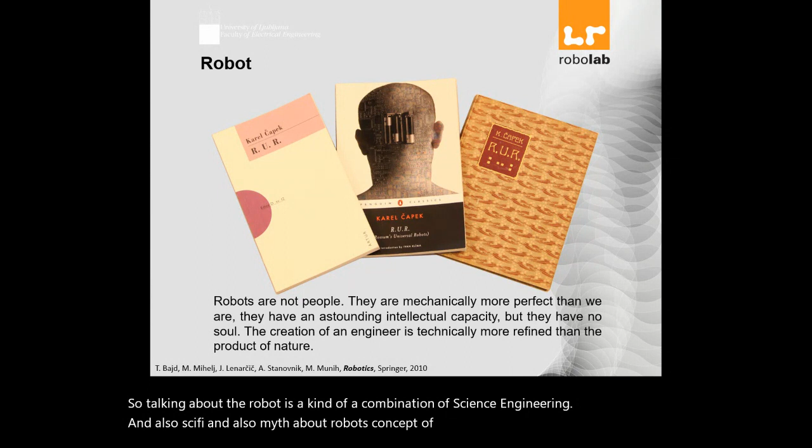Talking about robot is a kind of combination of science, engineering, and also sci-fi, and also myth about robots. Concept of robot is kind of related to creation, because when we talk about robot, the first thing that pops in mind, specifically for people who are not industrial or technical people, they think about humanoid robots which look like human, behave like human, they have behavior similar to what we do.

I don't know if you know an author, Isaac Asimov. Have you heard of him? Well, long back, teenage stories.

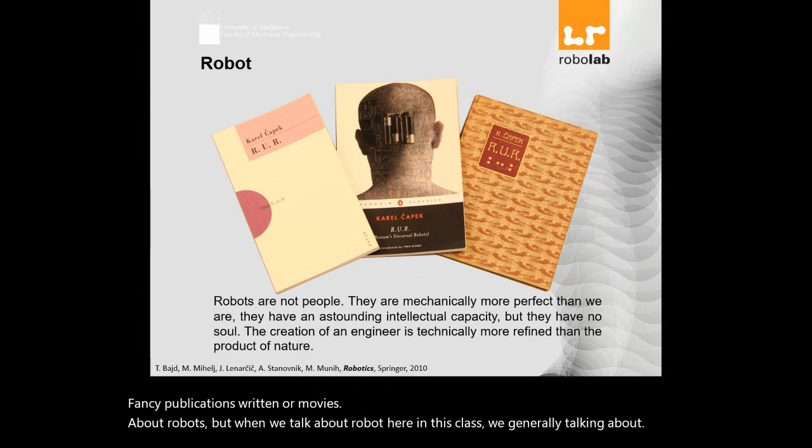Basic rules of robots, and you have seen these in movies and different fancy publications, written or movies about robots. But when we talk about robots here in this class, we're generally talking about actually mechanical creatures which can make moves. So the concept of creating a machine that can operate autonomously dates back to classical times.

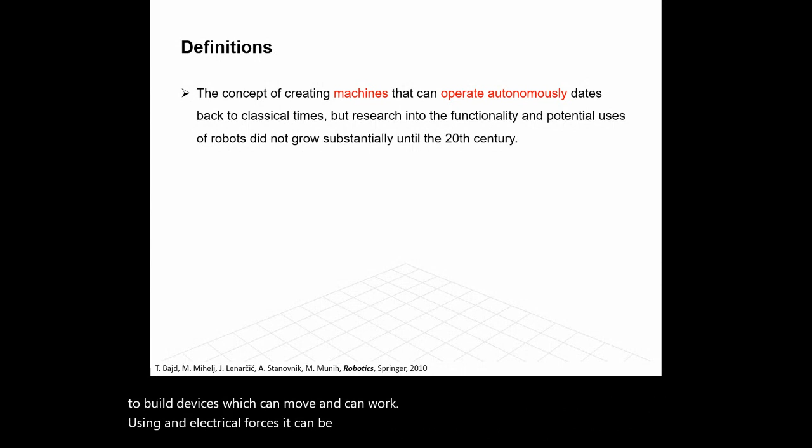But research into the functionality and potential uses of robots did not grow substantially until the 20th century. Actually, when our engineering became mature enough to build devices which can move and can work using mechanical or electrical forces, it can be controlled as well. So control is a key turning point in designing robots.

Throughout history, it has been frequently assumed by various scholars, inventors, engineers and technicians, that robots will one day be able to mimic human behavior and manage tasks in human-like fashion.

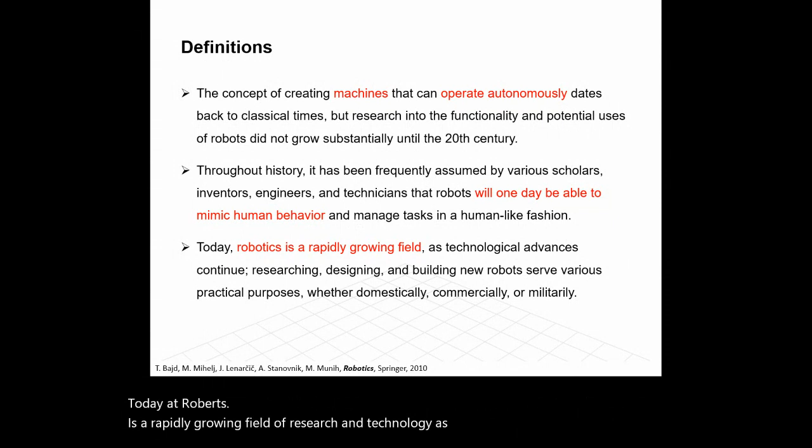Today, robotics is a rapidly growing field of research and technology. As the technological advances continue, researching, designing, and building new robots serve various practical purposes, whether domestically, commercially or military. You see robots all over the place now.

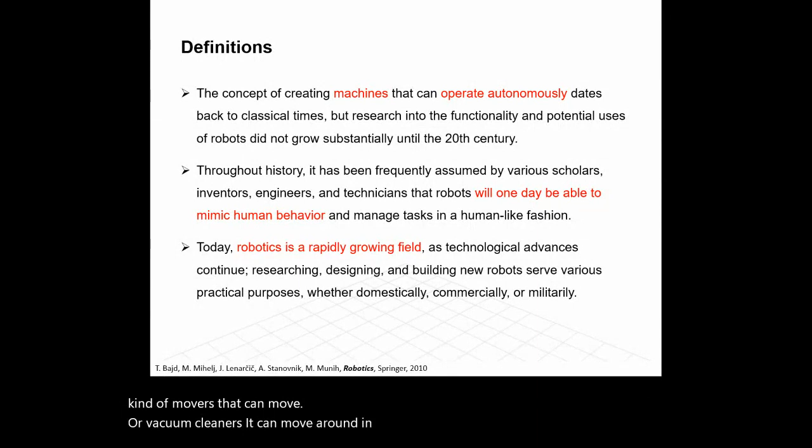It's not just industry. You see robots even at home. You have these kind of mowers that can move, or vacuum cleaners that can move around in the house and do basic things. There are concepts of robots.

Even we can add to this definition. We have also some software robots. The concept of autonomous operation has moved to software as well. You have bots on the internet. They continuously work, collect information, send messages, monitor those things automatically.

The difference between the robotics we're talking about and those kind of bots is all robots have a physical or mechanical implementation. They have a physical or mechanical structure.

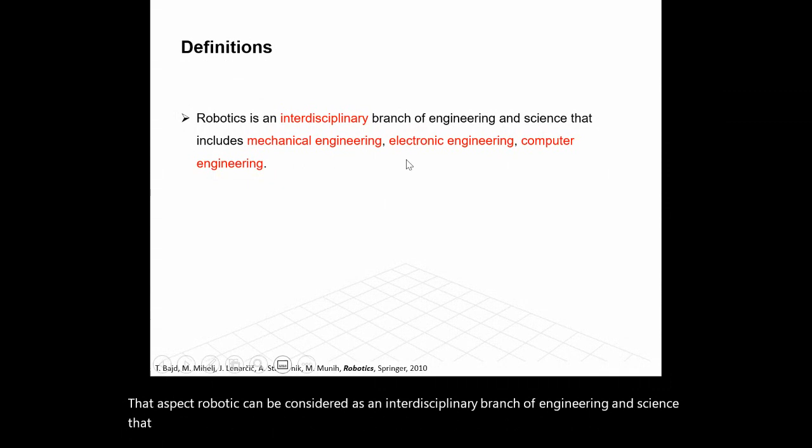So in that aspect, robotics can be considered as an interdisciplinary branch of engineering and science, that includes mechanical, electronic, computer engineering with different shares, depending on what kind of robot you have. The mechanical part might be a bigger part, or computer and electronic part in other kind of applications can be the more important part of the robot.

The field overlaps with electronics, computer science, artificial intelligence, mechatronics, nanotechnology, and even bioengineering.

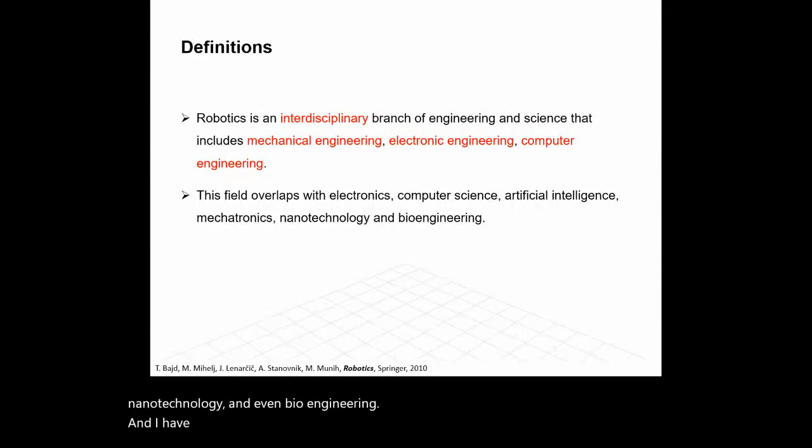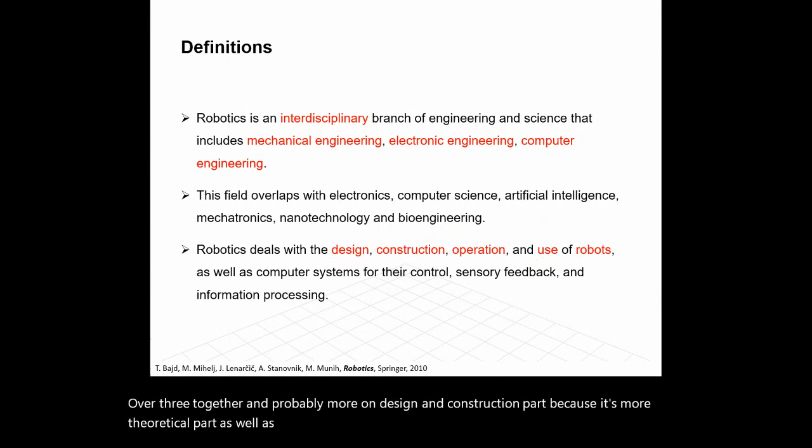Robotics deals with design, construction, operation, and use of the robot. So I would say probably it goes backwards. Using a robot, a larger number of people know how to use robots, and the operation actually. But the construction is higher level of information, and design is higher level of information as well. We try to move over all three together, probably more on design and construction part because it's more theoretical, as well as computer system and control, sensory feedback, and information processing.

From my perspective, robots are very similar to computers. In computers, you can program, you can interface with the computer. Your computer can interface with other computers, with the environment. You might program something which works properly, you might write a program which fails, you might write a program which works generally but sometimes fails. Exactly the same thing with robots.

The big difference is in robots, you have physical movement. That's a big, big difference. So what I'm doing in a computer might not make any sense in the physical world. I ask my computer to do something, and it just runs the program and it doesn't work, or it works. But in a robot, you write a program, and this program must be compatible with what you physically have as a robot, what you physically have as your environment and workspace.

So it's similar, but more restricted. And I think it can be more difficult because you have to have knowledge of what you have in your robot environment and the capabilities of your robot. There are similarities, but also big, big differences.

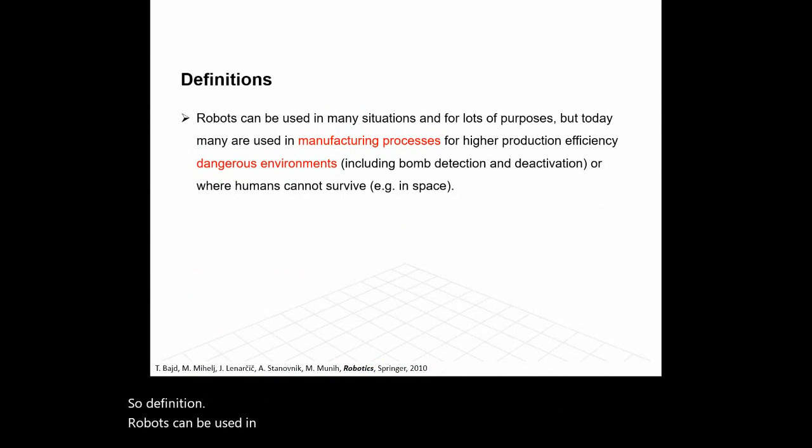Robots can be used in many situations for lots of purposes, but today mostly we are talking about manufacturing robots, which are used in manufacturing processes for production rate, for more efficiency, and for jobs which are dangerous or even impossible for humans to do, for environments which are toxic or very difficult or hard for human workers to go and work.

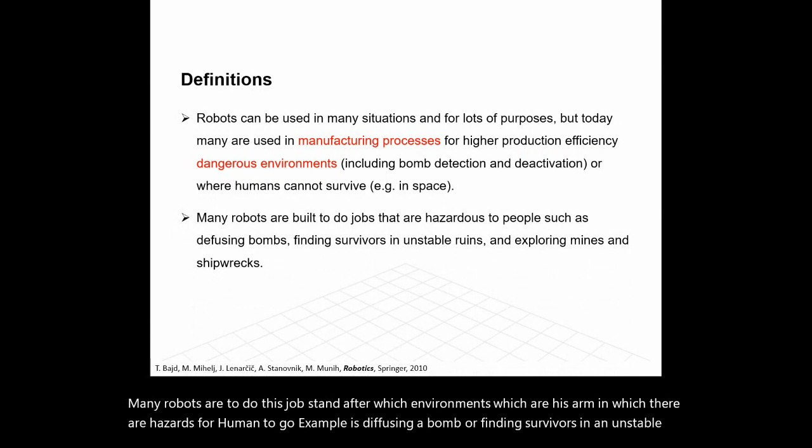Many robots are built to do these jobs in environments which are hazardous for humans to go. Examples are defusing a bomb, finding survivors in an unstable collapsed building or structure, and exploring areas humans can never go.

Robots have been sent to Mars before even humans can go, right? So if you want to give the credit, you have to give the credit to robots. Actually, robots have been working, and robots are already there before a human being can think of moving to Mars.

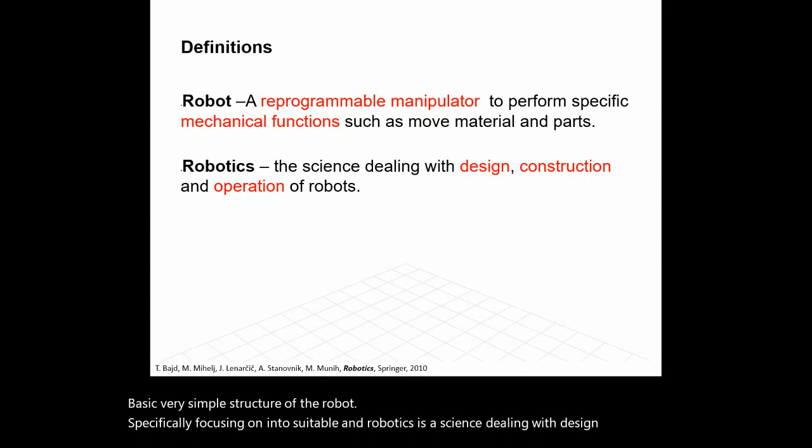By definition, a robot is a reprogrammable manipulator to perform specific mechanical functions such as move material and parts. This is a very basic, simple structure of the robot, specifically focusing on industrial robotics. Robotics is a science dealing with design, construction, and operation of robots. So we are talking about design, construction, and operations mostly in this class. Okay, any question?

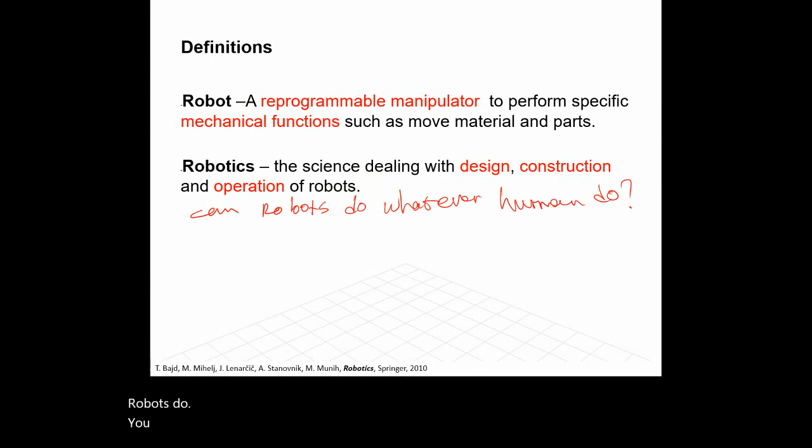What do you think about robots? So, what do you think? Can robots one day do whatever humans can do? In the future, can robots do whatever humans do?

What do you think, you say yes? Everything? Do you mean mechanically or mentally? I think it's limited by the human setting it up.

Okay, so for instance, you think it's possible for a robot to do figure ice dancing, for instance? Oh, that will be a tough call, right? Or doing gymnastics, think about the mechanical aspect of it.

Oh, I have to see the messages. I can't see them, sorry.

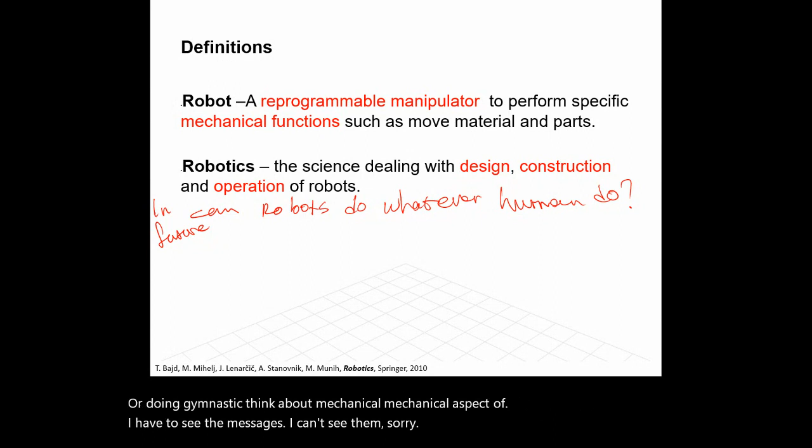If I want to talk about what these robots can do, you can divide it into two parts. One is intellectual, the other one is mechanical.

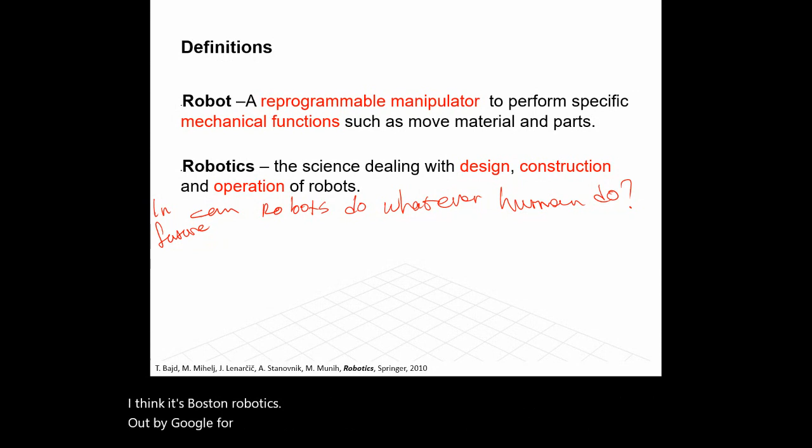Human body mechanics and movement looks simple. The human body looks very vulnerable, with all those limitations we have. But believe it or not, the mechanics and the way our body works is very, very difficult to repeat by mechanical devices. I don't know if you follow this company called Boston Dynamics, owned by Google for a while. Google sold it to a Japanese investment company called SoftBank. They are doing really good things, very beautiful movement, but they're still not complete.

Think about simply your hands, fingers, the accuracy you can work with, the movement and everything you have in our body. Do you know how many skeletal muscles we have? Muscles which are connected to our skeleton, by which we can make movement. Do you know how many we have?

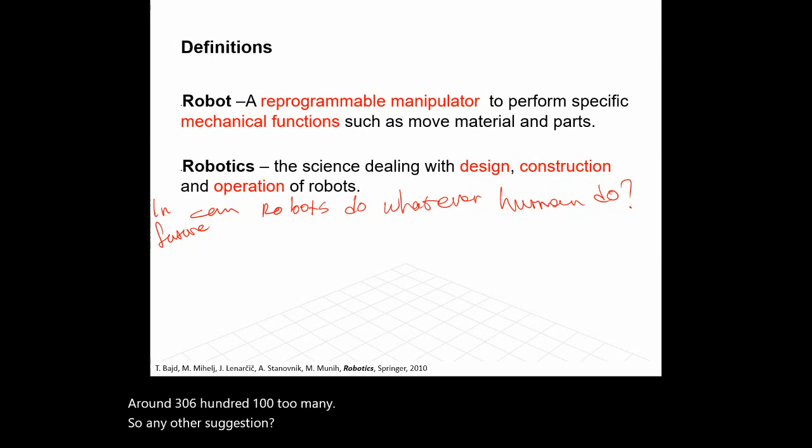I guess, isn't it close to 300? Around 300, 600? Burhan said too many. Any other suggestion? How many skeletal muscles do we have? 10,000? Oh, no, that is too much. Well, talking about muscles per joint, this is a general term, skeletal muscles which are connected to our skeleton and by which we can make movements.

Normally, it's not the case for everyone for sure, but on average we have 300 muscles each side, moving skeletal muscles, which makes 600. 600 muscles means 600 actuators, actually. Now think about a robot with 600 actuators. Well, people who are working with robots, how many actuators do we normally have in a robot, in an articulated robot?

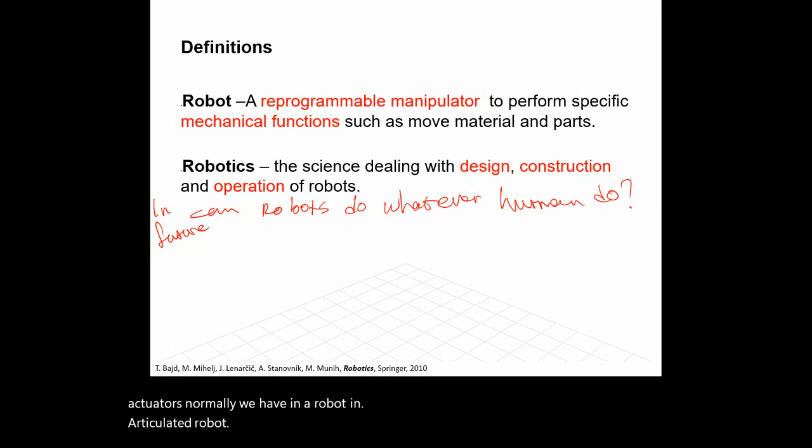Not number of freedom, how many actuators? For each movement we need an actuator, so it's around 6, 7, 10. Maximum, if you want to make it very complicated, it doesn't reach 20 for sure. So you have a robot with 6, 7, 10 actuators you can control, and you want to compete with a human with 600 actuators. It's not an easy task. I'm not saying it's impossible, but to reach that level we have a long way to go.

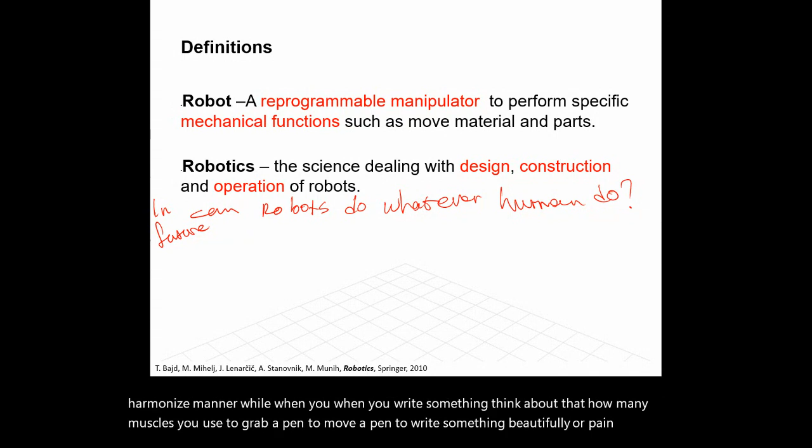We have to find out how to control all these in a harmonized manner. When you write something, think about how many muscles you use to grab a pen, to move it, to write something beautifully or do painting, or do other things at the same time. It's not easy, but hopefully in the future we will have robots that physically move like a human. That's why I'm not worried about our jobs. Robots cannot take our place in the close future, and hopefully never can they steal our jobs.

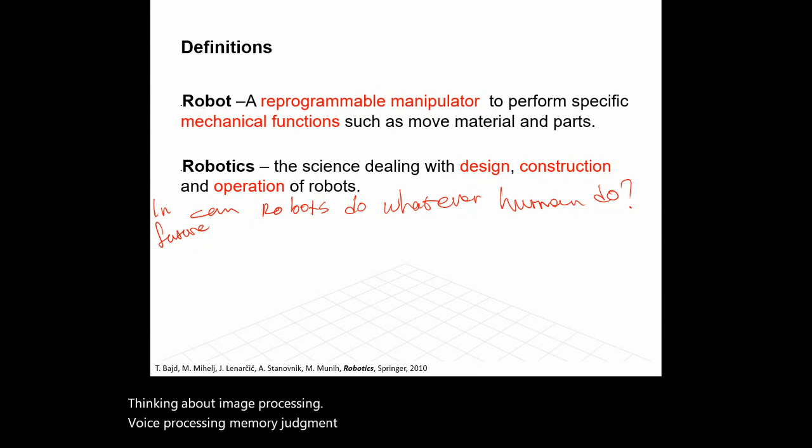Intellectually as well, we have a long way to go. Thinking about image processing, voice processing, memory, judgment, decisions, calculations, and computing - computers and robots are far, far from us. At least I don't think there is a threat in my lifetime from computers or robots.

Any question or any other thoughts you want to share? Okay, so no one worries about robots.

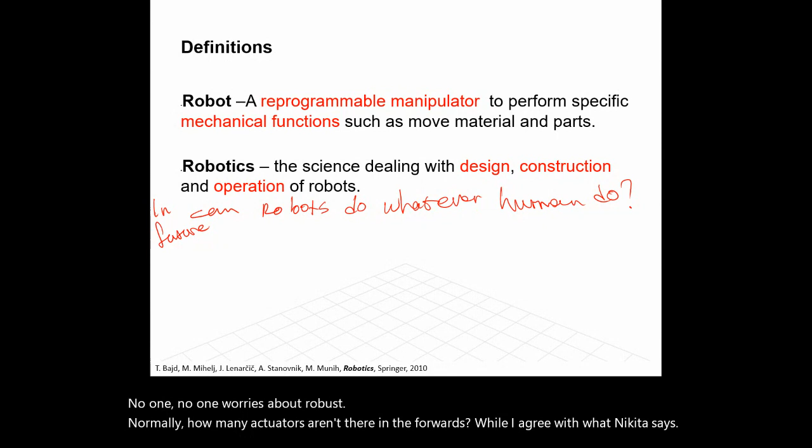Normally, how many actuators are there in a robot? Well, I agree with what Nikita says. In many robots, we have 6 degrees of freedom in articulated robots. 6 degrees of freedom means that normally at each joint you should have an actuator. So it should be around 6, not less than 6 definitely. It's normally 6 or more, but not too many. You can say for each joint I have 2, or I have more, but it will be between 6 and 10, I think - shouldn't go higher. That's the best of my knowledge. I don't know if anyone else can say.

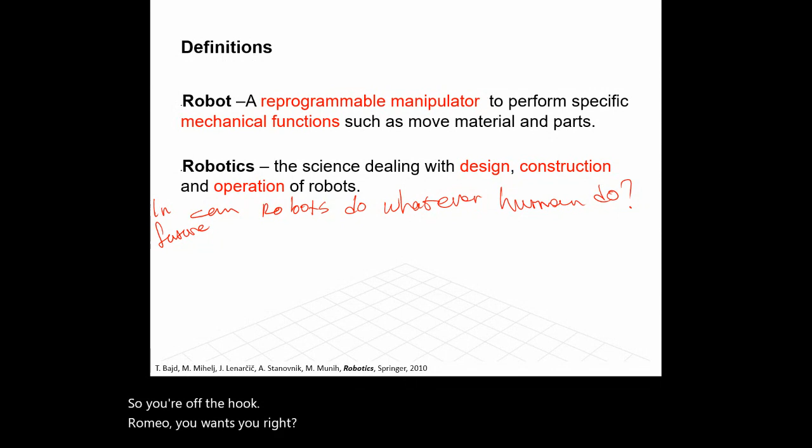Let me check who else said they've been working with robots - I know Gino and Mike. Jordan, Lou, are you working with robots? No, okay, so you're off the hook. Romeo, it was you, right? Yes. Okay, you answered the question - how many actuators we normally have? Yeah, 6 plus some actuators for grippers. Jordan, yes, that's right. So it's 6 plus, okay?

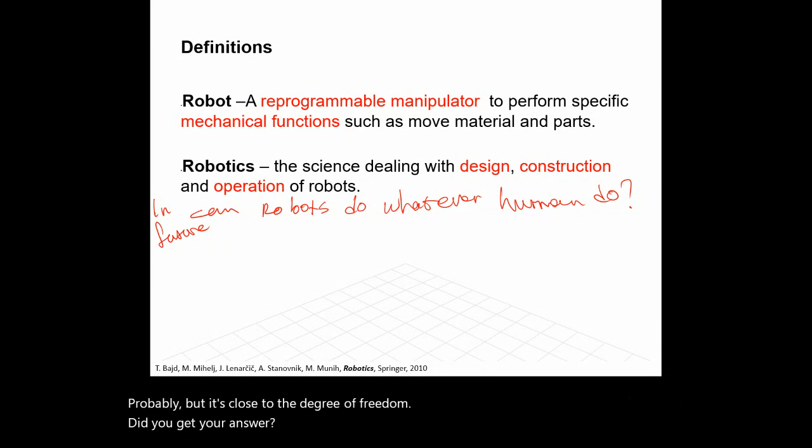If you have n number of degrees of freedom, your actuators should be n plus - a few more actuators, probably auxiliary actuators like for a gripper, or for some you might have more than one motor, or a combination of these. But it's close to the degree of freedom. Did you get your answer, Nasir? Okay good, thank you. Let's get back.

All right, so classification of robots - this is a general classification. I like it because it doesn't limit us to just one specific type of robot. It's divided into 4 categories of robots.

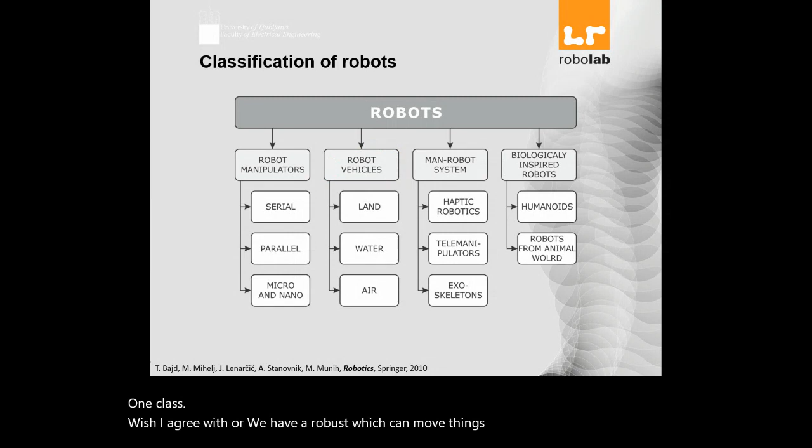Robot manipulators, one class. Vehicles, which I agree with - robots which can move things and are used for transportation. Man-robot systems, robots with interface interaction, direct interaction with humans. And biologically inspired robots - robots which are inspired from biology.

So manipulators can be divided into subclasses. A simple division - not the best, but very general and simple - are serial robots, parallel robots, and micro and nano robots. These are more advanced technology kinds of robots.

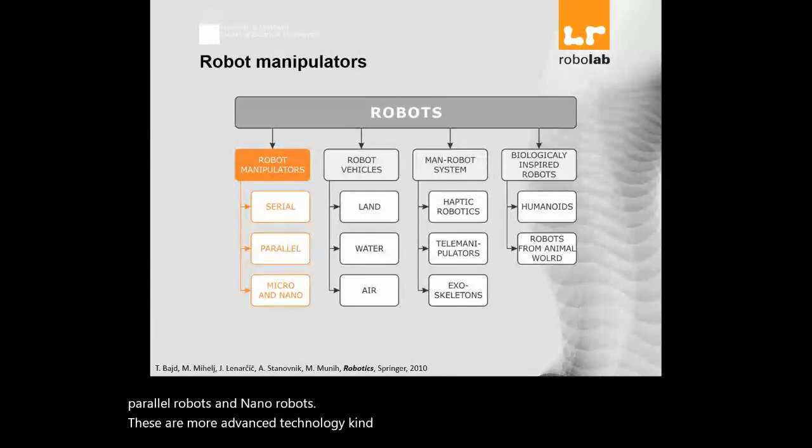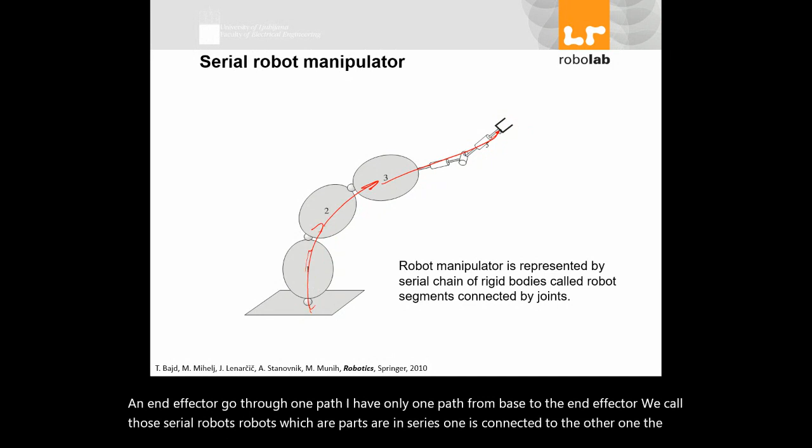In the schematic, you see the end effector here, and this is the base. The connection between base and end effector goes through one path - only one path from base to the end effector. We call those serial robots - robots whose parts are in series, one connected to the other, to the other, and to the end effector. We call these serial robots.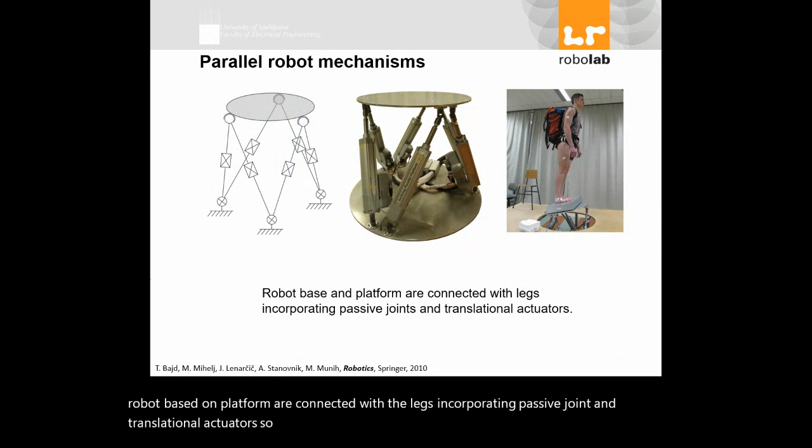So here you see on the right hand side, where is the robot in this figure? Underneath, can you see the robot? Yes, exactly, the platform under the feet here.

This is the robot, okay? Not the human, no robot. Robot is here, down here. So in this, this is a robot connected from, this is bottom up.

We also have robots in industry like this. What you see here, this is another robot connected, so it's connected to the roof and mostly used for pickup applications. Let me show you one example. They do have example of this type of robots.

No, not here. But you can search for robots. I don't know, can I share with you here? Let me see if I can do it.

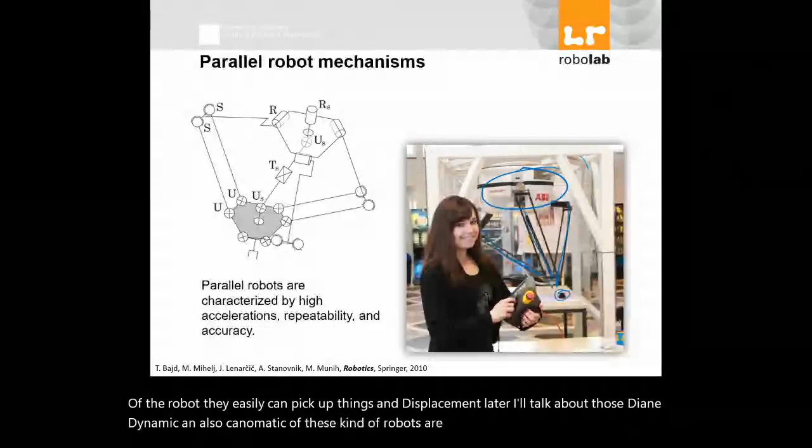Later, I'll talk about the dynamic and kinematic of these kind of robots, which are slightly different from serial robots. Basically, with parallel robots, you are reducing your freedom because there are more bonds connecting the end of the robot to the base. So generally it's more limited in terms of kinematics, but they're mostly considered to be faster, more accurate, and very popular in pick and place robots.

So you have a production line, and these type of robots are connected to the roof, and they just pick things and place them well in a position. It can be a box, or it can be in manufacturing on a conveyor. Okay, a parallel robot.

Have you ever seen any parallel robot in your work, guys who are working with robots? No. Yes, I have one in my lab. We use one for putting apples in trays. Oh, all right, okay. So let me see, I don't know.

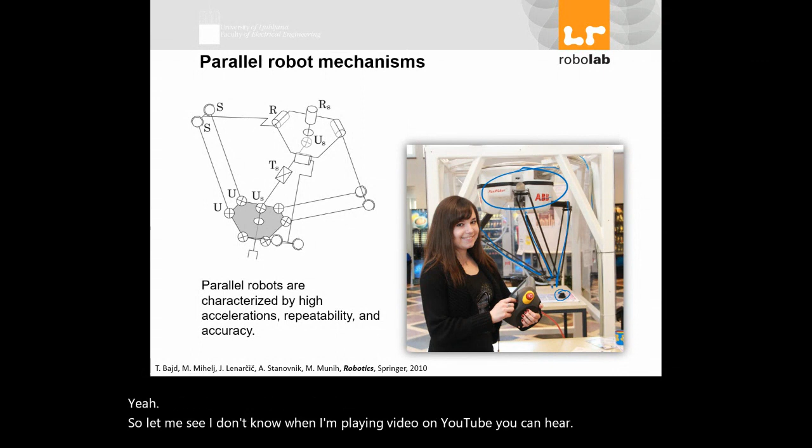So this is a parallel robot. It can work in even millimeter scale.

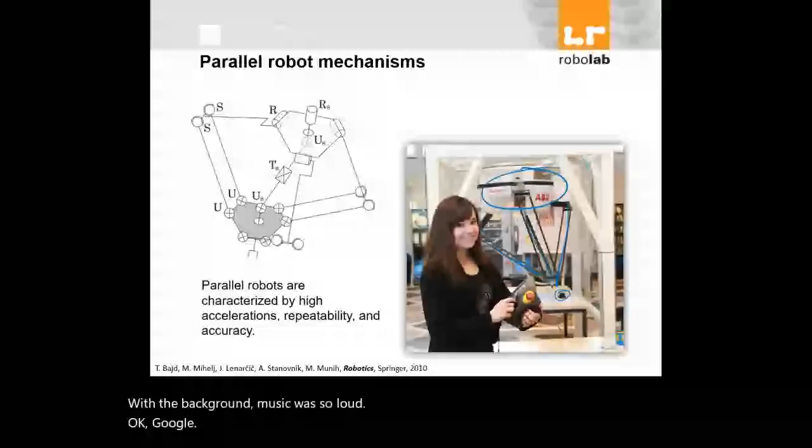Okay, going back to our presentation. So these are called parallel robot. Later, in terms of kinematics and comparing this robot with serial robot, I'll have a brief discussion about parallel robots, and there are benefits and downsides of parallel robots, and those will be discussed.

Do you know any issue with this parallel robot, Jordan? Have you ever seen that problem, or people who are working with it?

Do you know what's wrong or what can be wrong with these robots, parallel robots? Or with the particular robot in this picture? Generally speaking, there are some issues with this robot which might happen, not in every robot. We always have issues with that robot because it can bind up on itself pretty quick and you have to open up the top and readjust the linkages. And with these robots, the problem is they have...

Not the capability, actually the vulnerability of becoming collapsed. It can be shown by calculation that with this type of robot, there is a possibility it will go to a position which locks itself, and it doesn't come out without turning off. So there is a, well, in most cases...

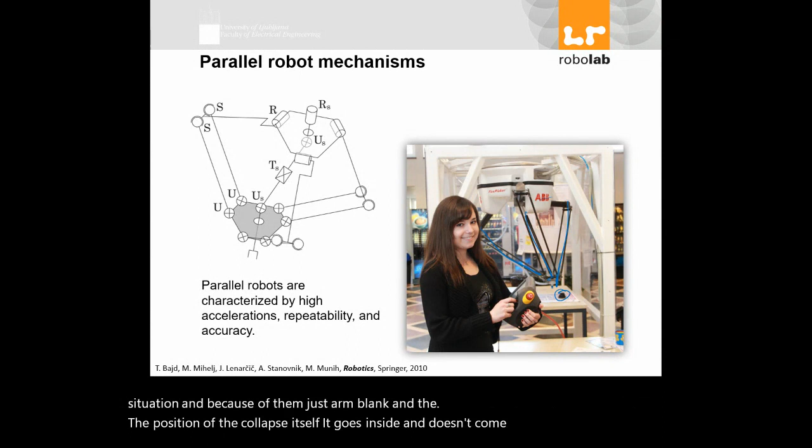Are you referring to singularity? There is a singularity, but not just singularity, here it collapses. It's a kind of singular situation - in serial robots we also have singularity, but in this one, because of the arm length and the position of the end effector, it collapses itself. It goes inside and doesn't come out, locks in that situation. You have to turn it off and open everything back up again.

In industrial robots, designers have limits and checkpoints to not let the robot get locked up like this. This ABB one, you don't see that problem. But with calculation, we show that in some cases there is a possibility this robot collapses itself and needs external help to be opened.

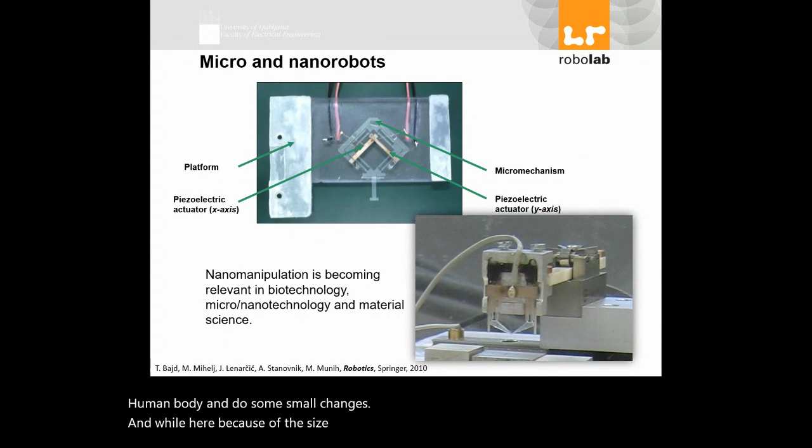Micro and nano robots, as the name implies, are very, very small kinds of robots used for operations or situations in which you normally don't send big robots, or don't have access to. These are nano manipulators enabling pushing, pulling, picking and placing, manipulation, orienting, bending and growing in a very small, micro scale environment. You've heard of applications like surgeries and biomedical applications with these types of robots - you can send them inside the human body and make small changes.

Because of the size and structure of the robot, you have a lot more limitations. You cannot use some sort of mechanical power sources. Still, mostly at research scale - in industrial level, I don't know, I haven't seen industrial kinds of this type of robot. I don't know if you've seen any nano or micro robots in practice, have you ever seen anything in class?

No? All right. Do you want to have micro nano robots inside your body? Yes? No? All right, okay. Well, I don't want to.

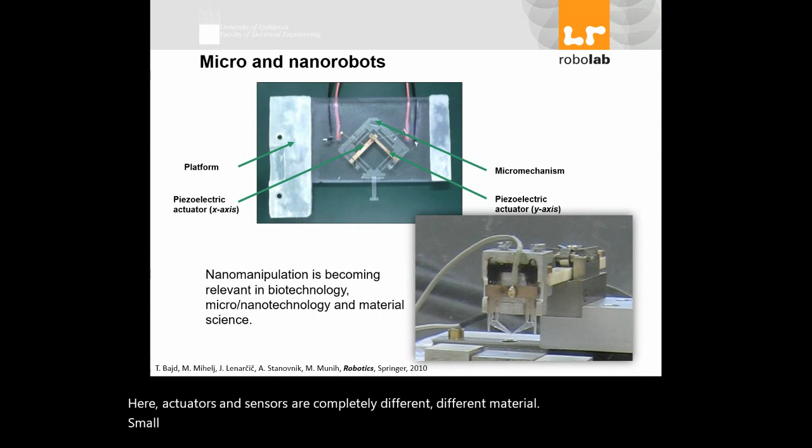Here, actuators and sensors are completely different materials. Small forces with small actuators. Sensors should be okay because they are themselves physically in micro scale sizes, but actuating is very difficult. For actuation, they're using materials - hopefully later on we'll talk about things like piezoelectric material or small electromagnetic forces inside the robot - more in research scale, not in industry.

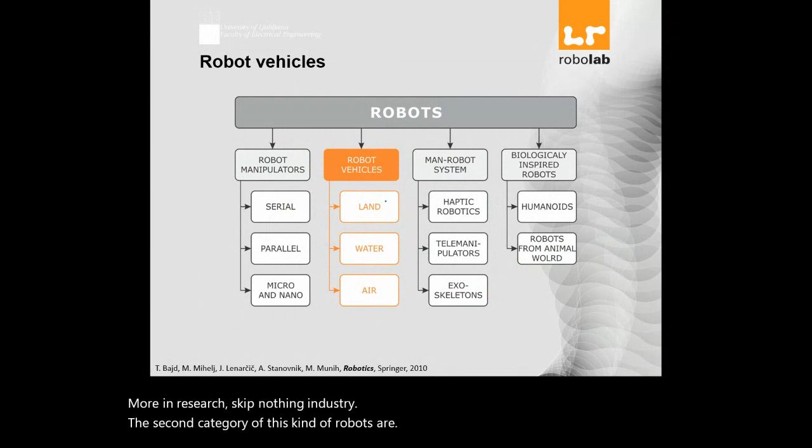The second category of these kinds of robots are transportation robots - they can be land, water, or air kinds of transportation. In these robot vehicles, we have a robot which is autonomous. It can get information from the environment - this information can be visual, or by sonar, or by LiDAR, different sensors and data input - and they have a computing part based on calculation of that information. They can find their pathway and go. Autonomous cars can be considered a kind of robot of this type.

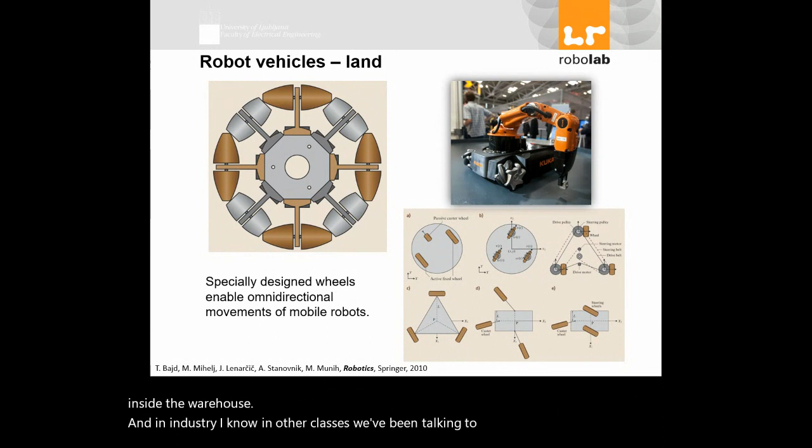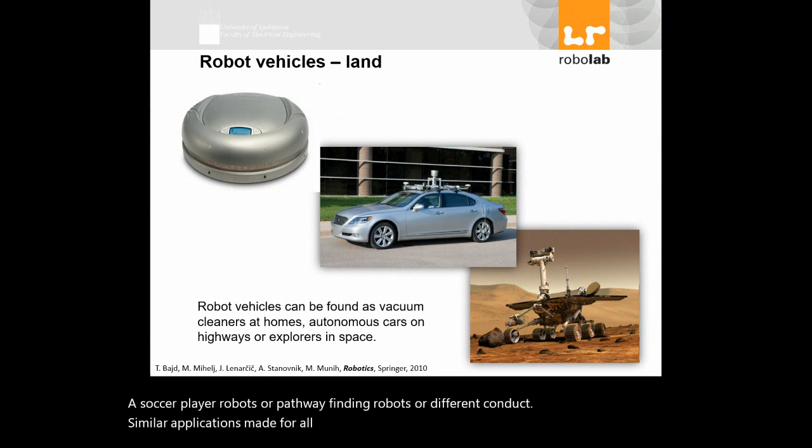On the research side, there are competitions for this type of robot, and students every year gather and build soccer player robots, pathway finder robots, or similar applications made for rescue robots as well. Other examples are autonomous cars, as I mentioned, and also robots we send to other planets. Right now the focus is on Mars, but who knows, probably other planets will be targeted as well using this type of robot in the future.

Drones or robots, they might not be completely autonomous, but they are remotely controlled. They need to have some autonomous capability as well. But they're very popular, you hear about them. They've become popular technology in military. Not just in military, they can be used in rescue, in border monitoring, in climate monitoring, in many different applications. And drones also come in small size.

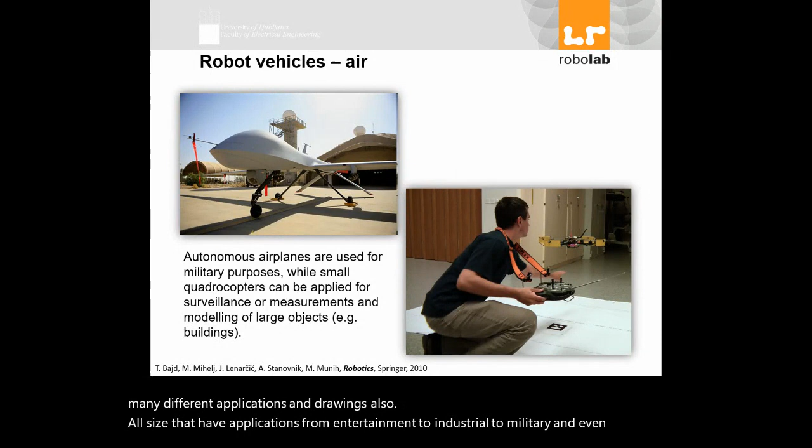They have applications from entertainment to industrial to military, and even to medical rescue applications.

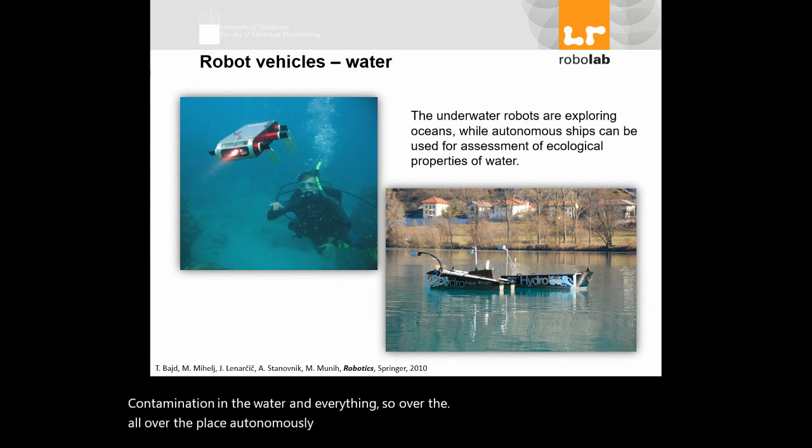So all over the place, autonomously or connected to a central control location. Any specific idea or anything you want to say about autonomous or robotic vehicles?

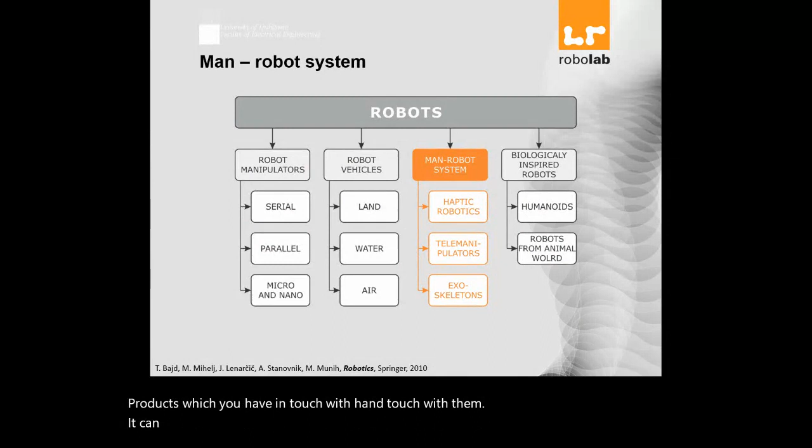The other category, based on what we have in this book, is man-robot system, where you have robots closely working with a human. It can be haptic robots, robots which you have in touch with, hand touch with them. It can be tele-manipulators, like telesurgery, teleoperation robots, and can be exoskeleton robots.

In haptic robots, the operator can sense touching objects in the virtual environment displayed on a computer screen. It's still mostly in research, because transferring sense from another environment to the human body is not an easy task. We don't have that many sensors of those types in the environment, and we also need very fine-tuned actuators to be used by the human hand or body to get the same sense from the environment into the human. But it's there.

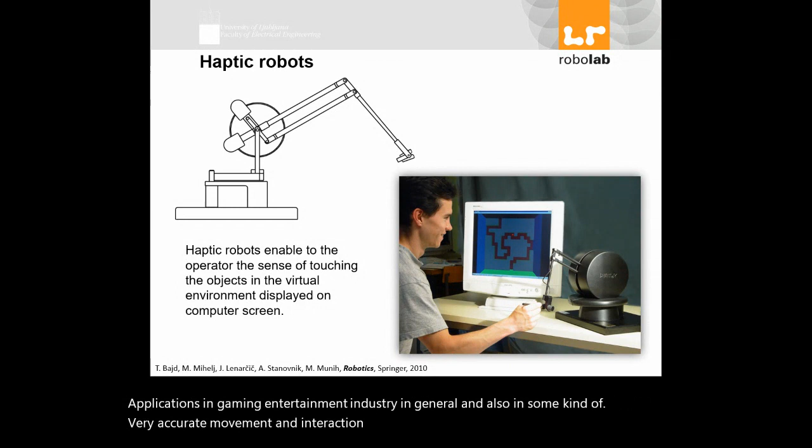Applications in gaming, entertainment industry in general, and also in some kinds of very accurate movement and interaction with the environment. Powerful haptic robots provide assessment and training of paralyzed upper extremity movement in stroke patients.

So more in rehabilitation and medical applications of this type of robot. In medical settings, robots are becoming more and more useful and popular, specifically in cases when you need continuous accurate monitoring or help with a patient, which you cannot have a nurse or a doctor do 24 hours a day, continuously watching or working with the patient.

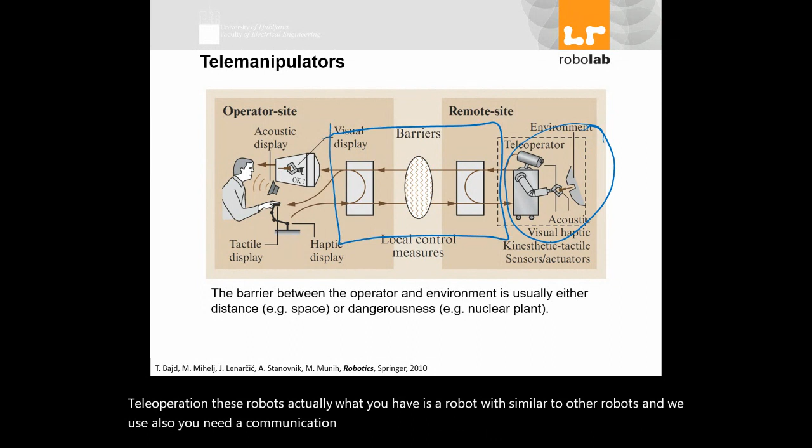Telemanipulators, again, for places which are difficult or hazardous for a human to go, or for telesurgery or teleoperation. These robots are actually similar to other robots we know and use. You need a communication system to connect them together, and you also need an interface for a human to work with. It looks simple, like using the same robot I'm using in my manufacturing line from home. Think about that: you're sitting in your home, watching through your monitor, and with a handle or keyboard, you're trying to control a robot several kilometers away.

Sorry, just give me a second. Sorry for the interruption, can you hear me back?

Alright, so imagine you want to run a robot from home. You're sitting in front of the computer, the robot is working kilometers away from you, and you have a connection. Think about different kinds of problems you might face.

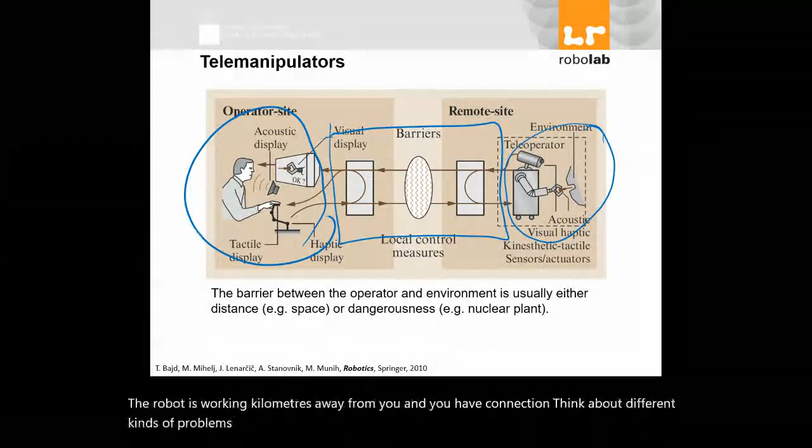The basic fundamental issue is... sorry, just I'm sorry for the interruption. Just give me a second, I'll be back.

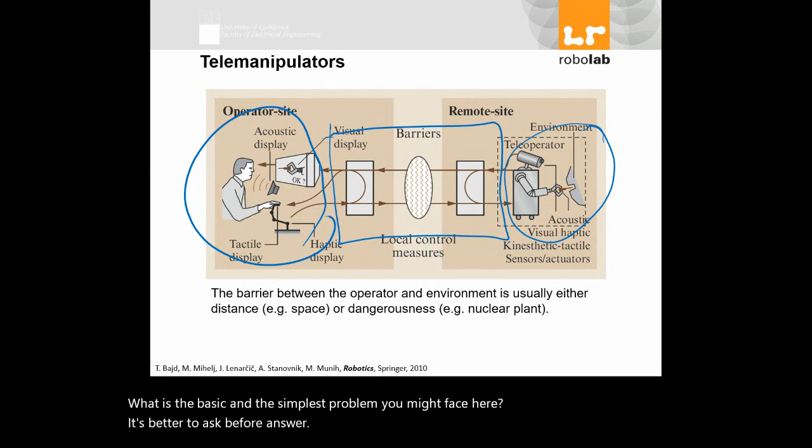It's better to ask: communication issues? Sorry, communication issues, yes, you might have interruption in your communication. Let's say your communication is also good, you don't have any problem. What is the next problem? Latency. Latency in feedback, like when you make a move, it takes a few seconds or even half a second to respond. There is a delay of delta t here, a time delay.

Has it happened to you ever? You try to move something, when it moves, something happens, and this delay between the time you get the information and the time your decision is applied can basically, in control theory, this is like a fundamental limitation. It has the capability to make your system unstable.

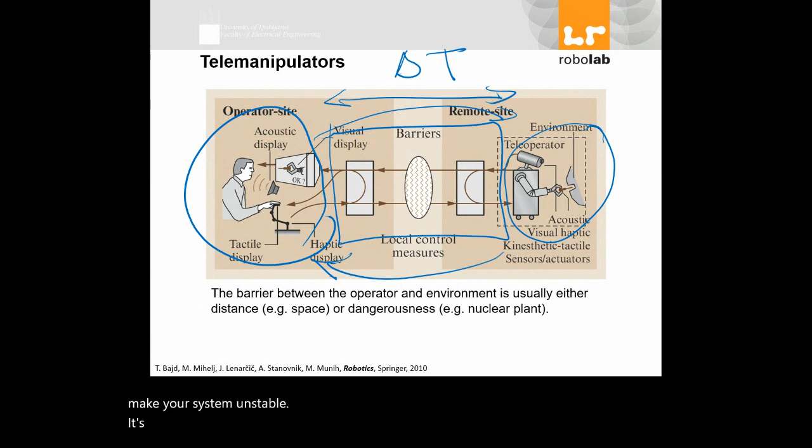It's like someone with a delay, very, very slow. Think about someone who is very slow trying to drive a car. It's very likely to cause an accident, because by the time you get the information, make the decision, and apply the change, something might happen in between.

So this is a very basic classic problem. That's why this robot has to have a kind of autonomy to compensate this delay, to create a proper platform. You should not need to specify every detail of movement to the robot. The robot should be able to decide, and you can only make decisions about larger movements, larger displacement, rather than every detail.

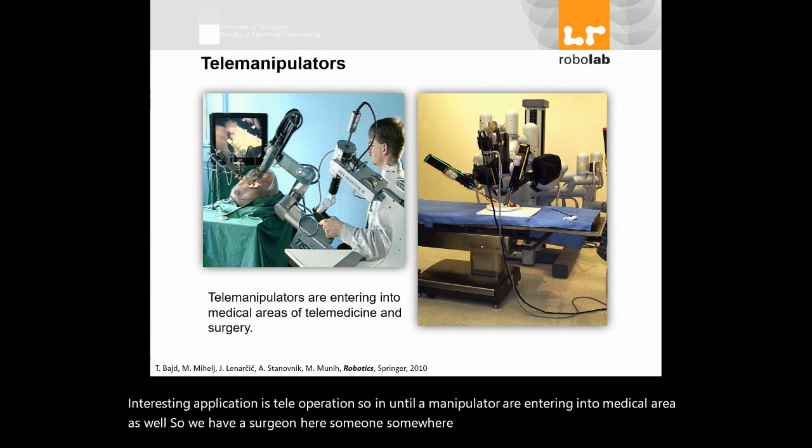A very popular and interesting application is tele-operation. Tele-manipulators are entering the medical area as well. So we have a surgeon here, and someone somewhere else who doesn't have access to a surgeon and needs an operation. If I have this robot placed over there, the surgery can be done remotely. But same problem as the previous example, even worse here because you're working with a living human or creature.

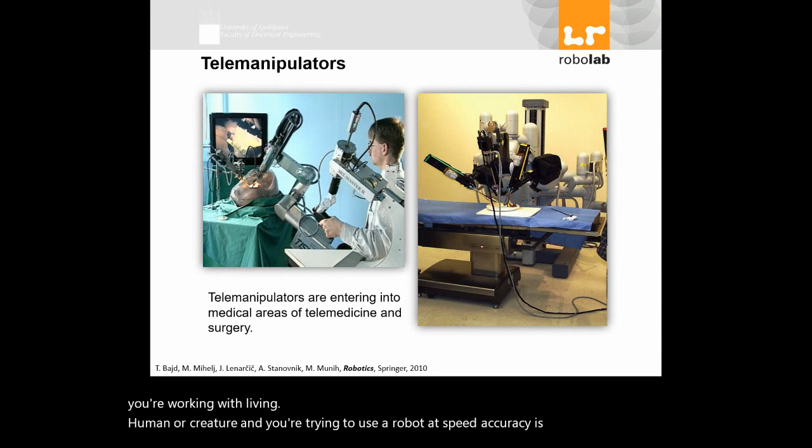Speed and accuracy are vital here. It can be lethal if you make a mistake. If your robot makes a mistake, or goes unstable, or if your connection gets disrupted, all these can be issues. But progress is coming.

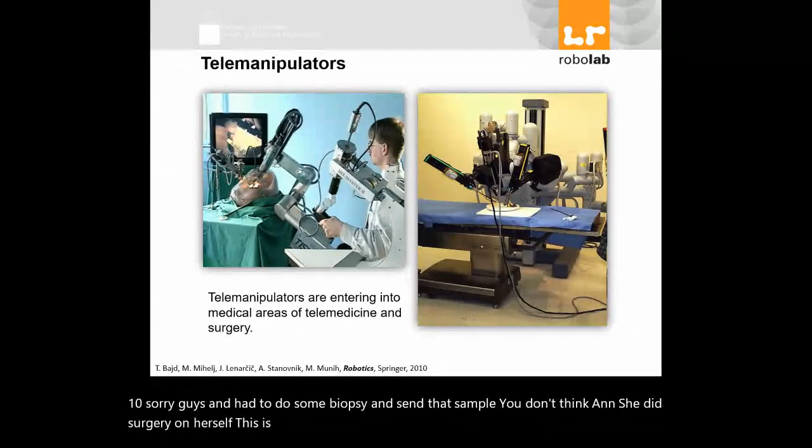And also in some cases we don't have any other choice. Have you read the story of the lady who was at the South Pole and couldn't come back for six months, and she realized she had cancer? She had to do a biopsy, send that sample, and did surgery on herself. This is kind of a nightmare when you read the story. It gives me comfort that I'm somewhere close to other people.

Okay, any question or any ideas here? Any other application for remote manipulator or telemanipulators? No? Okay.

Exoskeletons are another example of robots. In this kind of robot, they are like something you wear - you have them on you and they help you do things you cannot. It can be for people with moving difficulties, to help them move or do things they can't, or it can also be used as an extension, so you can move faster or become stronger in movement. These robots are in a class of exoskeleton robots.

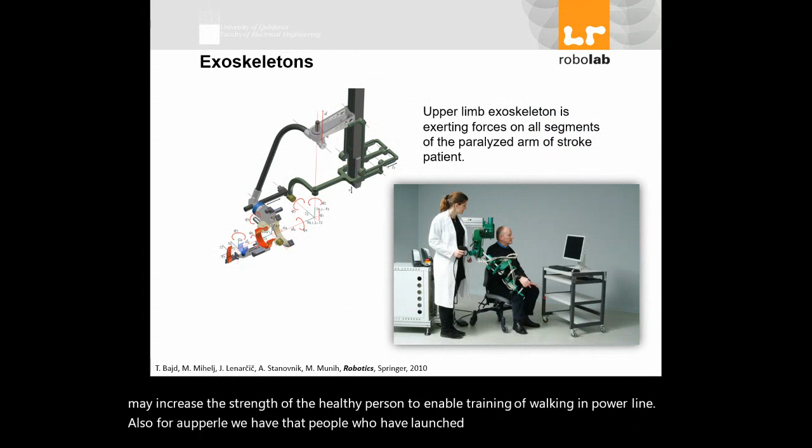So a lower limb exoskeleton may increase the strength of a healthy person, or enable training of walking in paralyzed patients or subjects. Also for upper limb, people who have lost or have difficulty moving their upper limb might use this. This is also a medical application for robots.

Unfortunately, in this course, we don't go in that direction - we don't talk about specific applications in biomedical. If you're interested, I encourage you to do your research, go through some studies on your own, or do a presentation in class. I will be more than happy to help you with whatever you need to learn in this field of work.

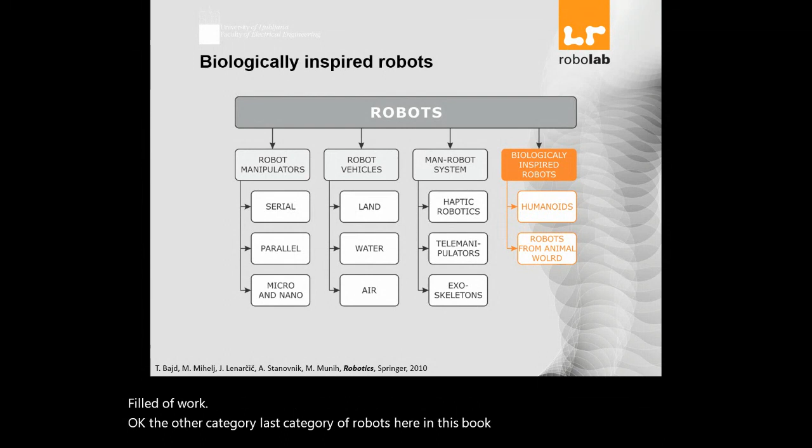Okay, the last category of robots in this book are biologically inspired robots. What does it mean? These are robots in which we try to be loyal to nature, to learn from nature. Although the previous robots as well - the concept, the basic idea of a robot - is also coming from biology, from nature. Having something that moves, an arm. You look at normal robots and they really look like an arm.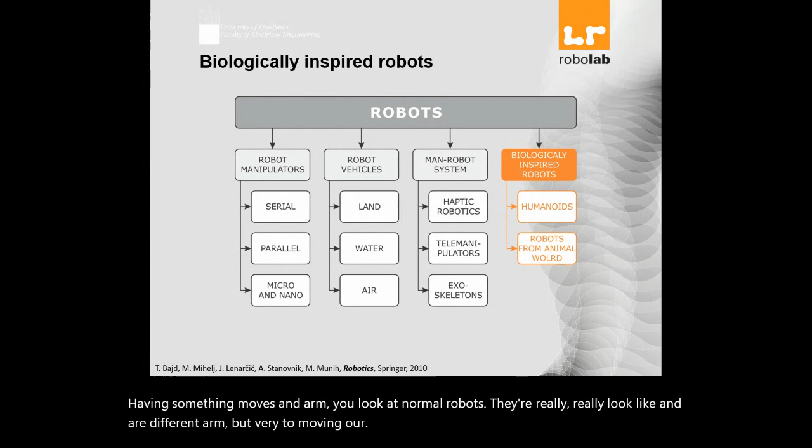A different arm, but very similar to a moving arm. Or think about vision, very similar to our vision. Sensors, very similar to our sensors. Although they come from nature and biology, this class of robots tries to do things very similar to biology, like humanoid robots - robots which stand up, have two legs, two hands, a head, shoulders, body, like what you see.

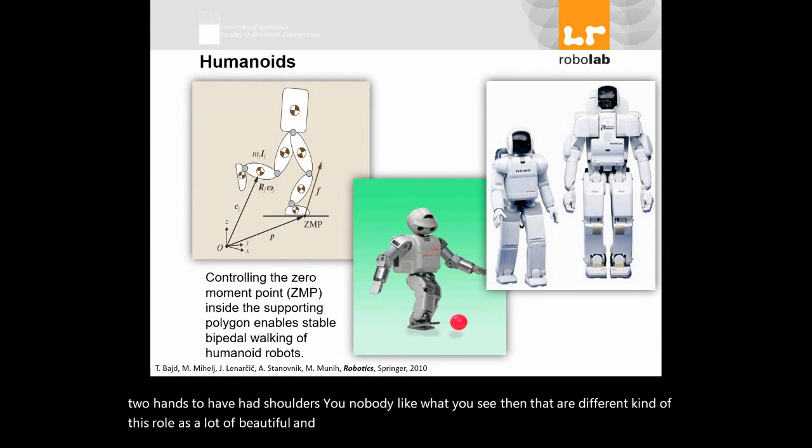There are different kinds of these robots, a lot of beautiful and interesting projects. I suggest having a look at what Boston Dynamics does with the robot called Atlas. Very interesting - have you seen that robot, Atlas? Has anyone seen that? Yes, you have seen that. And they do very beautiful movements. Even not every human can do what they do.

The most popular, probably the industrial one, is what Honda has made. Have you seen Honda's humanoid robot, called Asimo?

Asimo. If you search for Asimo, you see it looks like this little guy. This one, yeah, it's too close to me. Yeah, this is Asimo, I think. Yeah, this one.

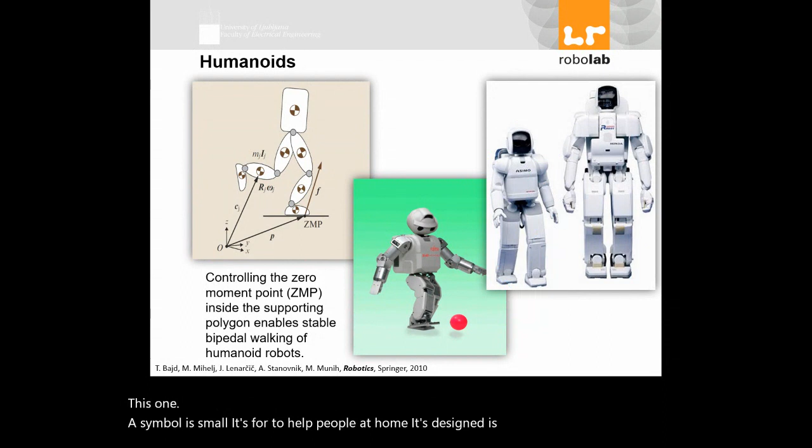Asimo, it's small. It's designed to help people at home. I don't know if it's available commercially or not, but it's very popular. It has image processing, speech processing, it moves, and it has a very good grip on the hand.

The hand is very similar to a human hand. It can grab things. Walking needs stability. Everything is very similar to the human, and it can process. These are humanoid robots.

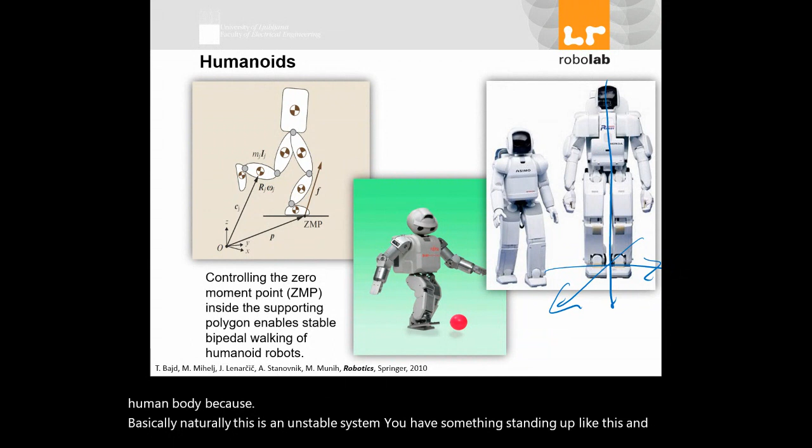Think about that. Designing a humanoid robot is not an easy task. Think about the dynamics of the human body, because naturally this is an unstable system. You have something standing up like this and staying still like that, or moving like that, is difficult. Mechanically, it has a lot of calculations to make a humanoid robot move and walk smoothly, go upstairs, jump, run, carry something. These are difficult.

Many people argue, why should I have a robot look like a human when it's much easier to use wheels or other shapes which are easier to do in industry? But this is another direction, and it has interest and investment, so scientists and researchers go in that direction.

What do you think? Is it a good idea to have human-like robots? Is there any benefit in that? So who agrees that humanoid robots should work in industry? Please say yes if you agree.

Yes, I agree, yes definitely. You want them to look like human, right? I'm more familiar with the idea. You don't see him as a threat, as a machine that is going to kill you with a touch.

Okay, and why, Nasir? Why do you think it's better for robots to look like humans? Practically, when you have a robot looking like a human, especially on assembly lines, it's more comfortable for the other workers or human workers to work with the human-like machine, even if it's stronger, even if it's much stronger, still made of metal.

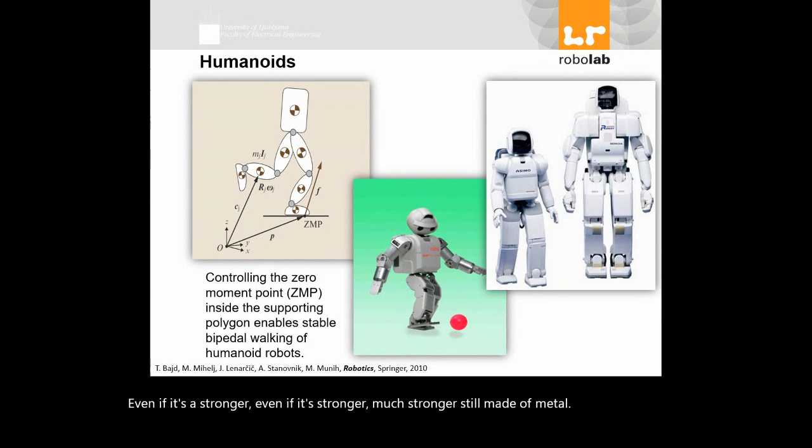I spent a lot of time in assembly lines, many years in Canada and the US, and I have seen a lot of robots and AGVs. There was a discussion at one point, 10 years ago, about why don't we have a robot, something like a human, doing really tough jobs which a human can't do, like lifting the whole bumper system and putting it on the vehicle. Currently they have like 2 to 4 people engaged to lift the bumper system and install it on the vehicle. So we said, why don't we apply a robot to do this job, a human-looking robot?

So yes, I agree with you. Yes, we need something, a robot looking like a human.

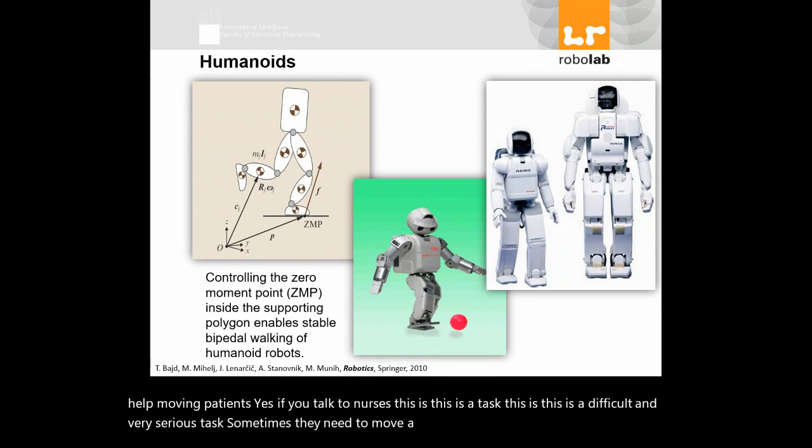Jason also makes a comment saying that in medical settings, it's much better to have a humanoid robot to help move patients. If you talk to nurses, this is a difficult and very serious task. Sometimes they need to move a patient. There are equipment also, but if you have a humanoid robot which can help with that, it will be helpful. I don't know, do you agree?

So why do you think it's better to look like a human in that case, Jason? Is there any reason you want it to look like a human? Why not like a machine?

Okay, more responsible, huh? So you can sue them, huh? You can sue them, yeah. So yeah, all right, more friendly. Well, yes, that's part of the actual psychology of the robots.

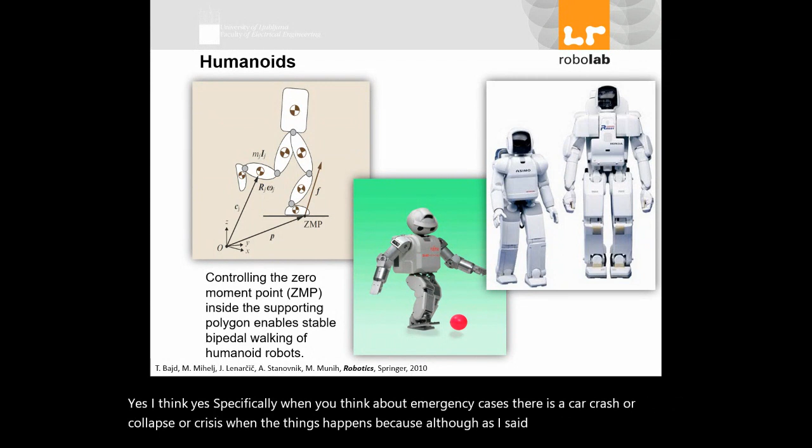Okay, look like the robot Sophia. Yeah, Sophia, I'll talk about Sophia as well. You know, I like it. It took attention more than any other. Yeah, this is the psychology behind it.

So, definitely, good or bad, they're coming. Anyway, I don't know, people are working on different pet-like, even pet-like robots. Well, it looks creepy, but it's a humanoid robot. I hope to have a face covered with something more human-like.

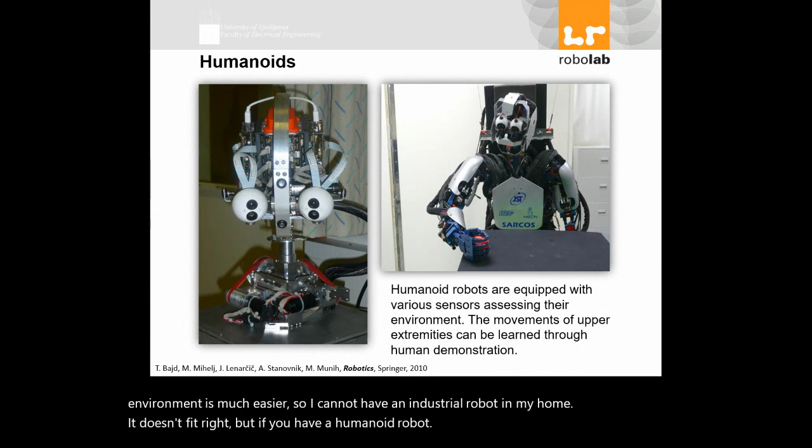Humanoid robots are equipped with various sensors assessing their environment, movement of upper limbs, and learn through human action. So interaction with humans and moving into human environments is much easier. I cannot have an industrial robot in my home, it doesn't fit, right? But a humanoid robot is much easier, it can come upstairs, open the door, walk through different places in the house. Since we want robots to work with humans, it's better to build them to fit in the environment.

It's not just humanoid. There are other bio-inspired robots, inspired by different creatures, insects. I think more than anything else, insects have been interesting to researchers and scientists.

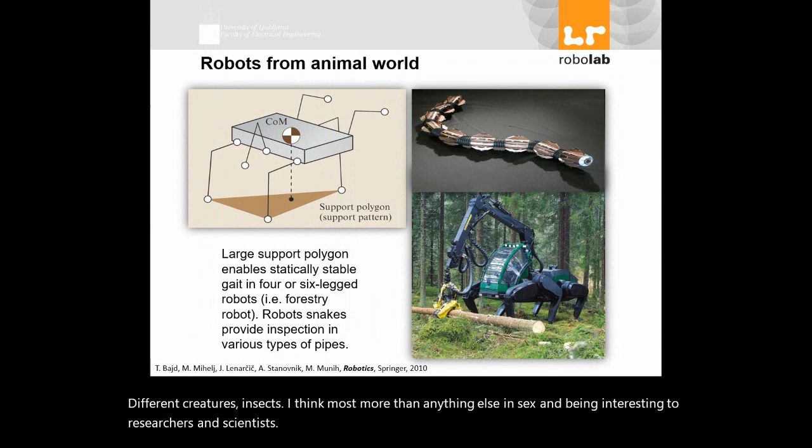Snake-like, this one definitely reminds you of a scorpion. Exactly, looks like a scorpion. I don't know if they intentionally designed it like this, but it has legs and can move on an uneven surface easily. They don't need to pave the road for this kind of robot.

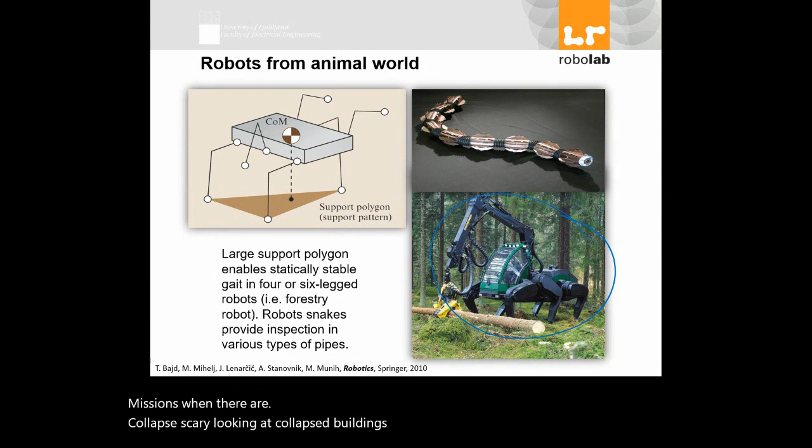They can move around, and snake robots are mostly useful in rescue missions, when there are collapsed buildings. They can go through with minimum disruption, because when there is a collapse area you shouldn't move anything, it's very unstable. Some people might be underneath the collapsed buildings. So this snake type is very popular in rescue robots, and there's a lot of interesting research in this, including military research.

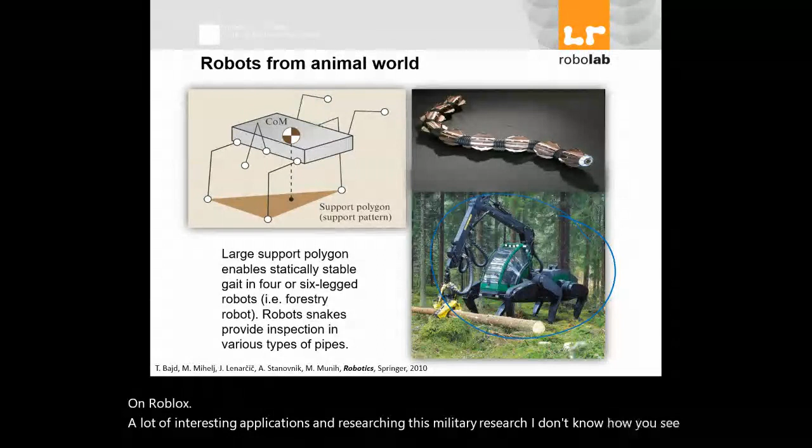Have you seen this robot again by Boston Dynamics? It's called Big Dog. It looks like a dog or a donkey or a horse, can carry a load, and it walks. It's beautiful. If you look at it, you see the technology and design they have implemented is fantastic. It really, really looks alive.

And industrial robots, which will be the main focus of our course. So I'll leave it here. I think that's all for today.

Okay. Yeah. It froze.

Okay, good. So any questions so far to this point? No? All right, thank you very much.

Today what we did: we had a brief review of the course outline, what we're going to do this semester, the evaluation, and the topics to be discussed. We briefly reviewed basic concepts in robotics as an opening introduction for the robotics course, and briefly reviewed different types of robots, with a beautiful discussion about what we have and what we're going to have.